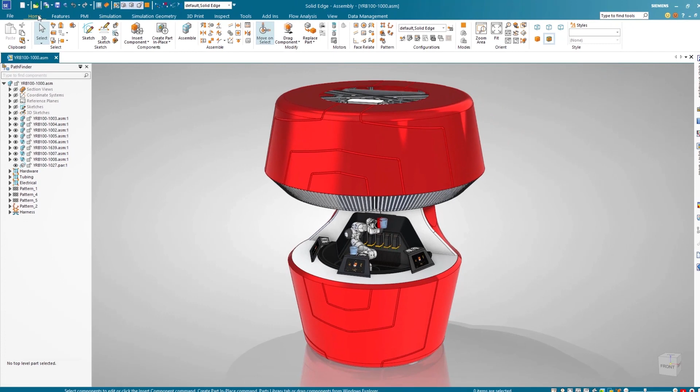Introducing a fresh, modern user interface which is consistent across all Siemens software products, all commands and environments have been refreshed and now provide an easier-to-use, modern, clean look and feel, but still at the core, the Solid Edge you know and love.

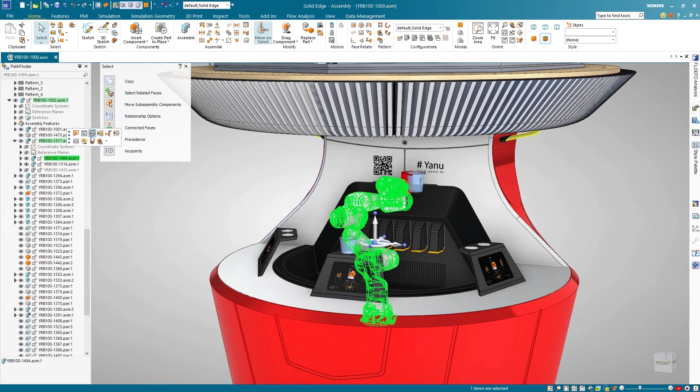The Context toolbar now has expanded capabilities in the part, sheet metal, and assembly environments, providing high-frequency, object-specific commands at the tip of the user's cursor, improving productivity. Focusing on the robot arm, we'll complete the new design of a glass holder.

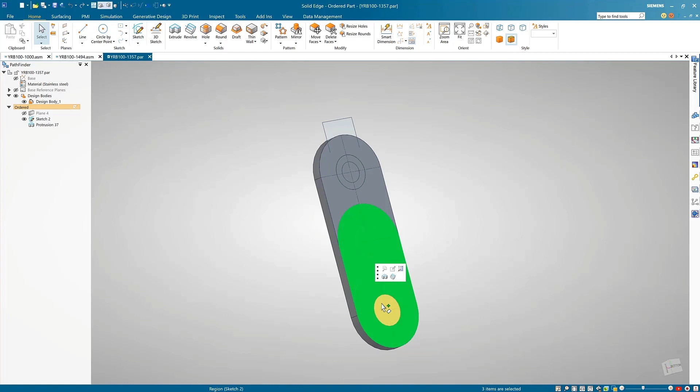The material addition and removal workflows have now been combined into one single command. Also new is the introduction of the automatic regions in ordered sketches. This speeds the process of sketching as it eliminates the need to trim sketch elements and project face edges.

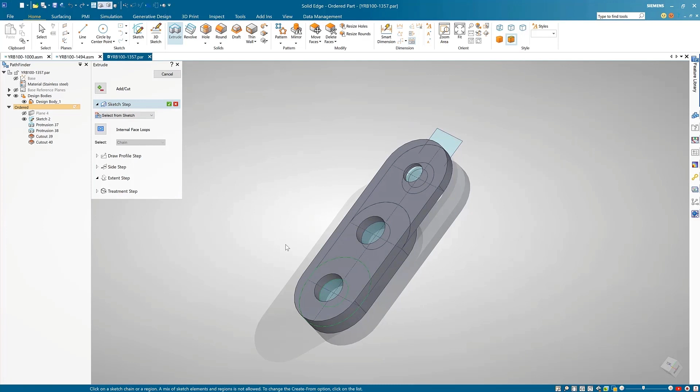Closed areas are simply found automatically, as can be seen here, as we add and remove material with a single extrude command. Also notice the Context toolbar delivering all commands at your fingertips. Changing an extruded feature to a cut couldn't be any simpler. Just edit the feature and change the options. When adding features, the spacebar can also be used as a quick toggle to switch between add and remove.

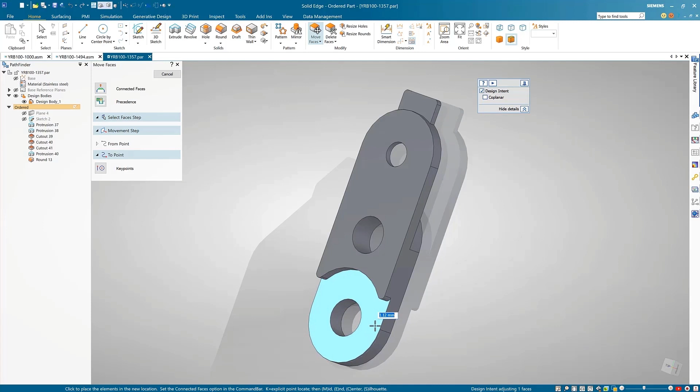Solid Edge speeds up the process of direct editing in an ordered model by introducing synchronous capabilities in the move, rotate, and offset face commands. Here, the steering wheel is used to easily define the move and rotate directions, and design intent rules can be used to control the movement of the other faces in the model. We can see this as we adjust these two cylindrical faces and toggle the concentric option off and on.

One final alteration on this part is to add an angle to the side face by using the rotate command. The enhanced workflow makes this a breeze. Since this is an ordered model, the move and rotate features are captured in the Pathfinder and can easily be edited later.

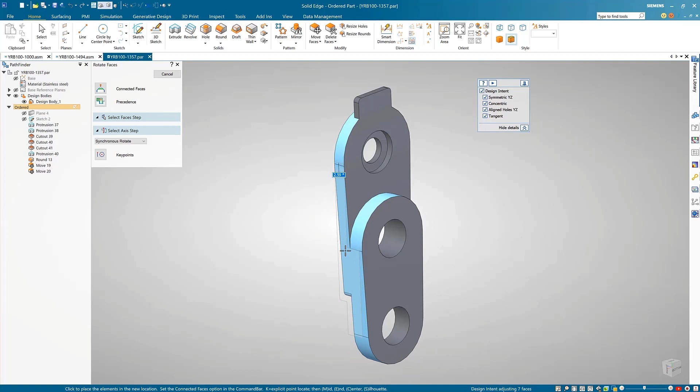The hole feature capabilities have also been extended and now have support for standard fit class tolerances for hole, countersink, counterbore type holes. These conform to ANSI, ISO, and DIN standards.

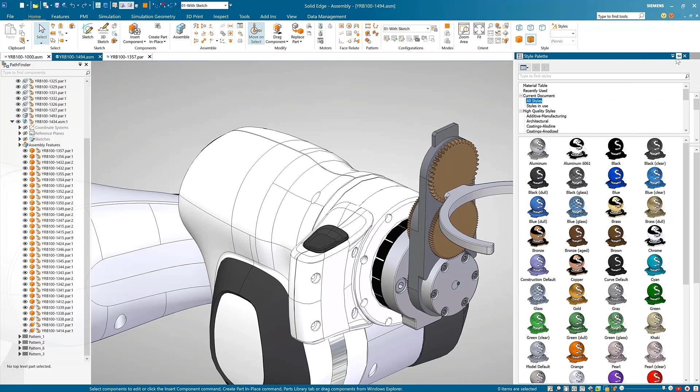Support for unit tolerance has also been added, as well as a new library of high-quality face styles which consist of many common categories containing thousands of different styles, ranging from additive manufacturing, coatings, fabrics, plastics, metals, and many more. They can simply be dragged and dropped onto the desired parts to easily add realism to any design.

There have also been improvements to assembly features with the addition of new commands such as subtract, slot, union, and swept cutout. In this case, we'll add a swept cut to document a routed path through two wooden plinths at the top of the design. The workflow is the same as in the part environment, but with the additional step of choosing the parts to cut.

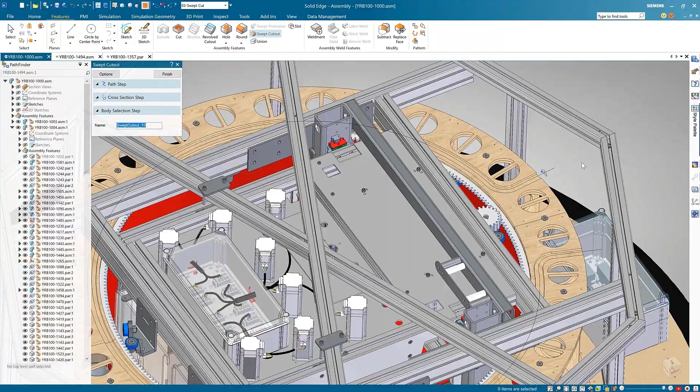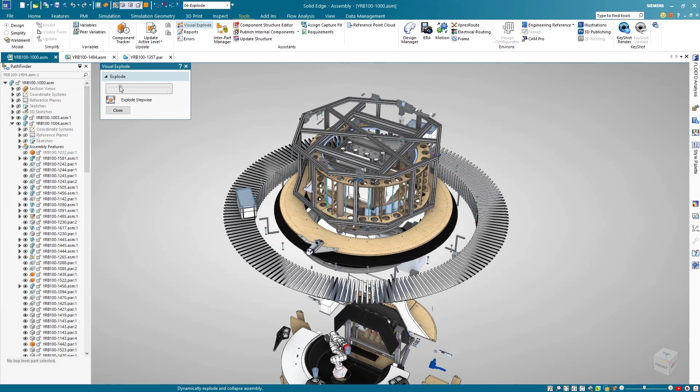Finally, there are new workflows to easily explore and visualize the internal components of any design with a new Visual Explode command. Simply drag the slider bar to dynamically explode the parts on screen, then drag it back to collapse the parts back into place. There is also a stepwise option which intelligently explodes the subassemblies in sequence and provides additional ways to visualize the design.

Solid Edge continues at the forefront of 3D CAD and remains ahead of the curve thanks to increased core CAD performance, new and improved workflows promoting productivity gains, and the continuous implementation of user-requested features and functions.

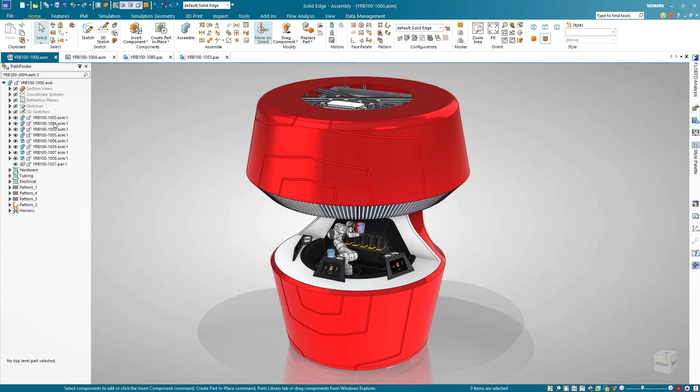Solid Edge provides new advanced PMI and model-based definition capabilities, allowing users to detail 3D models faster and easier than ever before, and to seamlessly share 3D model intelligence for downstream manufacturing processes and to other relevant stakeholders.

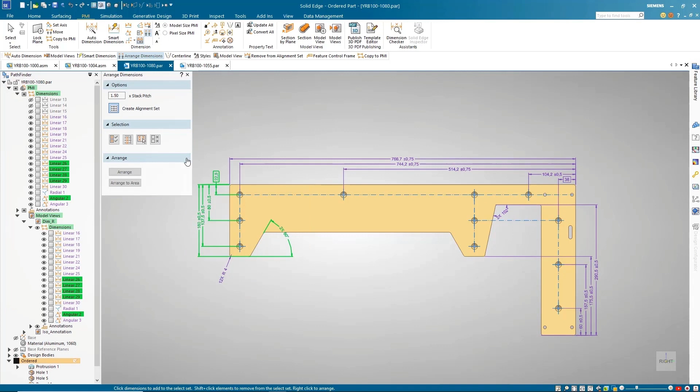New with Solid Edge Advanced PMI is the ability to automatically arrange dimensions on a 3D model with a couple of clicks. Simply select the needed dimensions and arrange them stacked or chained. If dimensions need to be arranged with respect to a smaller area of a model, there is an Arrange to Area option which makes this task easy too.

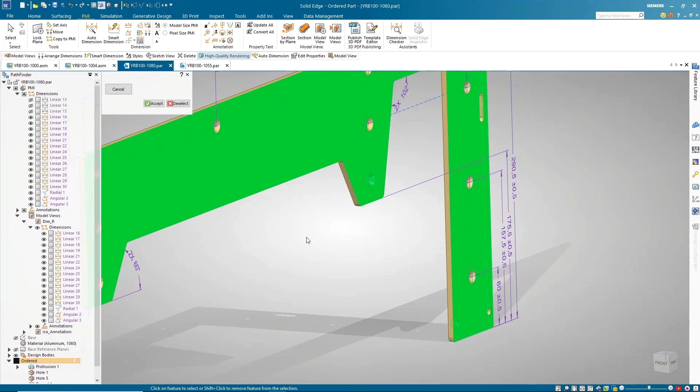This part lacks the necessary dimensions for the size and location of some of the holes. The new Auto Dimension capability takes care of this with ease. All we need to do is select the primary, secondary, and tertiary planes and select the features to be auto-dimensioned or even just auto-dimension the whole model. With support for planar faces, cylinders, and holes, it's never been easier to save time in dimensioning your model. We can even define tolerances to be automatically added to each dimension.

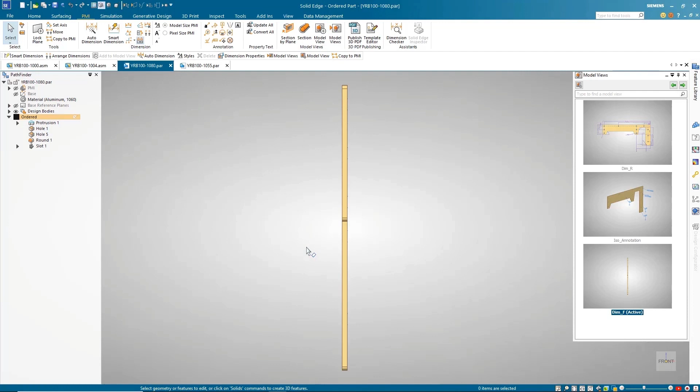The new Model View palette allows for fast interaction with model views and displays easy-to-understand thumbnail images which are directly derived from the model views themselves. Model views can be navigated by clicking on the images or using the arrow keys. It's also easy to create new views directly from the palette.

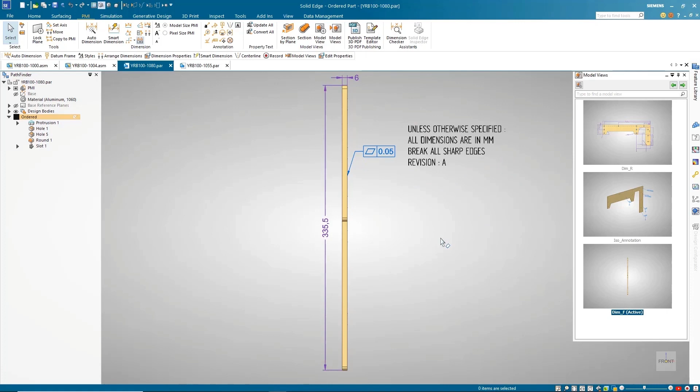Here we'll create a front view for our part to add some of the necessary dimensions to detail the overall height and thickness of the part, and also add a geometric tolerance for flatness. With new text box and notes library features, we can more easily add notes to the model views. These notes can include model properties, like the latest revision of the part in this example. There is also an option to keep the text parallel to the screen.

The creation of drawings is a breeze through the new Model View palette. A right mouse click and selecting a template is all it takes to create a drawing. The same Model View palette can also be used in the draft environment. We will use it to bring in the front view and use the alignment function to ensure it's in the right place. The fit class and tolerance of holes can now be easily retrieved in callouts.

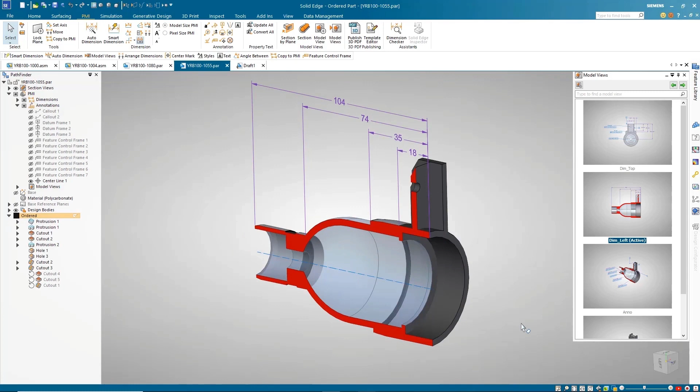Also, the ability to modify the color of cut faces on section views means it's even easier to differentiate internal details of a model and communicate necessary product manufacturing information. 3D Center Axis annotation is now supported for appropriate geometry types, giving users a quicker way to add the desired product manufacturing information to their models.

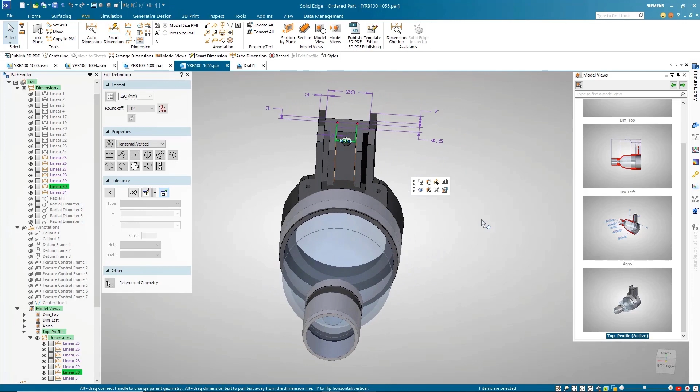Section view dimensions in sketches are now associated to the design body, making it easier to use them in downstream processes. The copy to PMI workflow has also been improved. Now when copying selected 2D annotations and dimensions from a profile-based feature or sketch, once they become 3D dimensions, they are now automatically connected to the corresponding model faces. Selecting the PMI will highlight the associated faces.

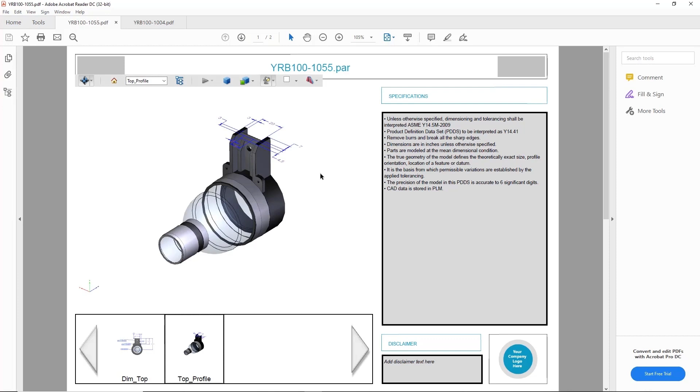Solid Edge model-based definition allows designers to publish all this product information for use in downstream processes. This process is simple and easy, and the publish process creates a high-quality 3D PDF which contains all chosen model views and supports full view manipulation. Assembly documents can also contain a fully interactive bill of materials and much more.

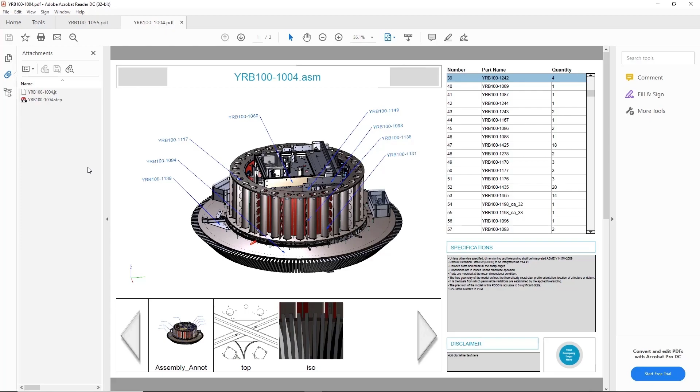Solid Edge Advanced PMI and model-based definition capabilities provide new streamlined tools to detail 3D models faster and easier than ever before, and to seamlessly share 3D model intelligence for downstream manufacturing processes and to other relevant stakeholders.

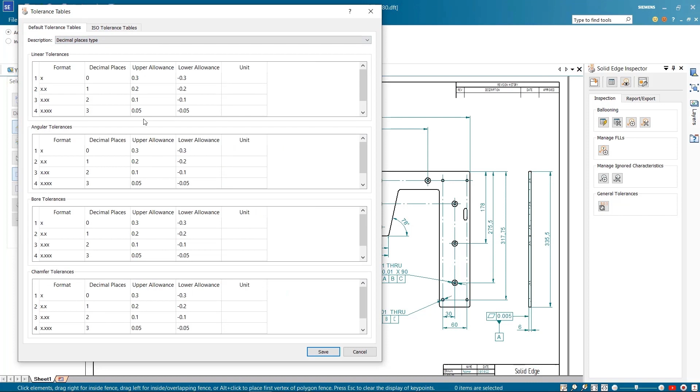Quality inspection is an important competitive factor. Using Solid Edge Inspector makes inspection planning a quick and easy process. Taking a look at the side plate in the Yanu AI robotic bartender will open the drawing that already has all the relevant manufacturing information defined. Launching Solid Edge Inspector, we can set the tolerance standards required. If needed, multiple tolerance tables can be configured, which can later be applied based on part type.

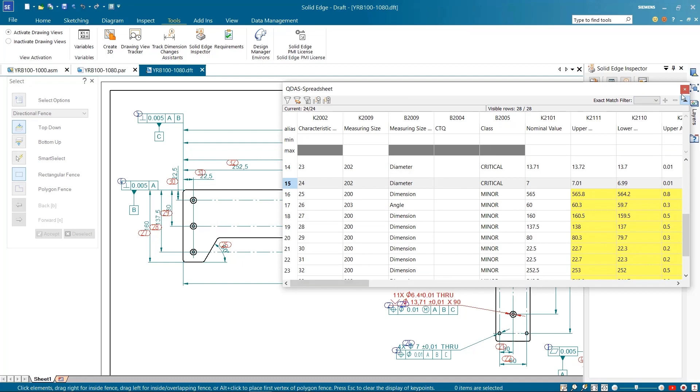Creating characteristic numbers with balloons is a quick and easy process. There is also the flexibility to create balloons manually or ignore some specific dimension types. Based on the standards and configurations which have been set here, the default tolerances get applied for the dimensions which don't have specific tolerances defined. These dimensions are highlighted in yellow in the characteristic table. At any time, the dimension class can be controlled to define how critical they are. The inspection balloons can also be shown or hidden when required.

This inspection information can be exported into multiple file formats, which can later be used in downstream applications. It's also possible to export this information as a separate project file, which can later be re-imported into the drawing. This is very useful in situations where the quality team doesn't have write access to the CAD files. Inspection reports can be generated by choosing a template that can be easily configured for any industry standard.

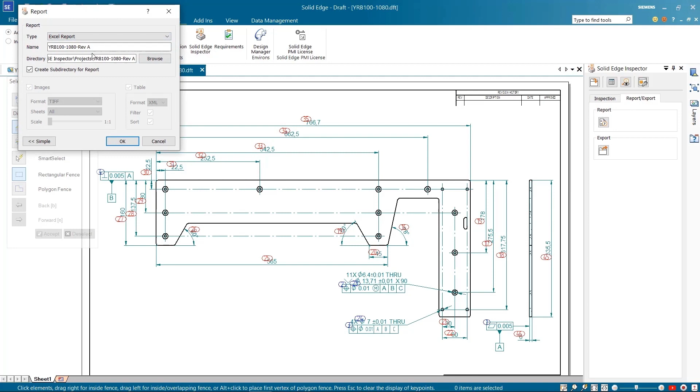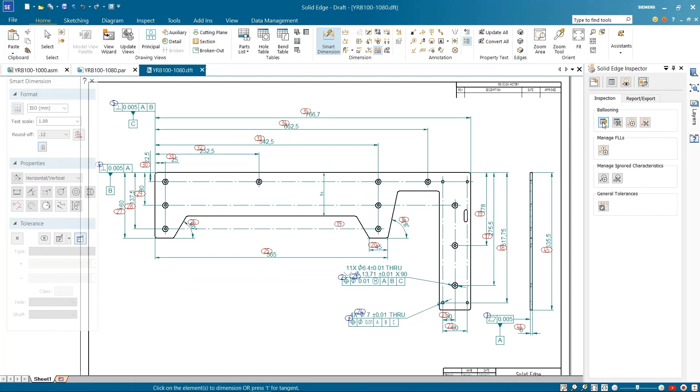The inspection data can also be easily updated to accommodate any design changes. Here, a change is made to the model in the drawing, then subsequently updated. At this time, we'll also delete a dimension and add a new dimension. Then a click of a button updates the inspection data. This will add a balloon to the new dimension and update the CN list with this and all the other changes that were made. The changes like modified, new, and deleted dimensions are captured as part of the CN list.

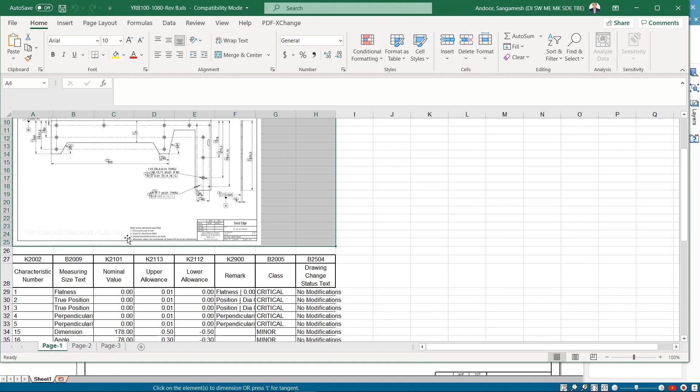Filters can be applied to these columns similar to Excel. As the design has been modified and the drawing updated, we'll generate the inspection report and see the updates. The list shows new, modified, and deleted dimensions. Filters can also be applied to the CN list to generate a compare report.

This shows only the changes that were made when compared to the previous revision.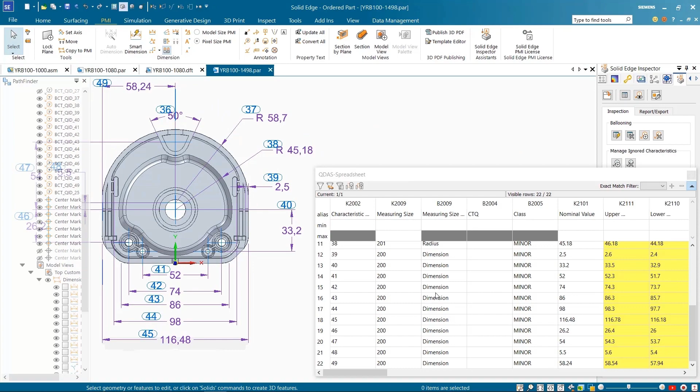Solid Edge Inspector also fully supports a model-based inspection process. This means it works seamlessly on the 3D model in an MBD workflow. Just like we saw for the 2D drawing, it's possible to create and edit balloons and generate a report on a 3D model using the PMI dimensions and annotation. Solid Edge Inspector, providing a competitive edge by streamlining the quality and inspection planning process.

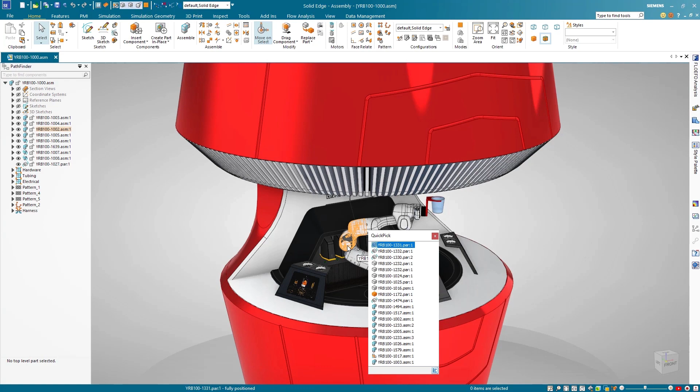Solid Edge is even more tightly integrated with other downstream processes and now has the ability to transfer assembly kinematic information to applications such as NX or Process Simulate in order to perform further dynamic studies or operations. In this example, we save time and minimize errors by transferring the motion kinematics of this robot arm from Solid Edge to Process Simulate.

Starting in the Solid Edge motion environment, we'll make sure the kinematics are properly defined by selecting the parts, then choosing which ones are moving or fixed. This creates the 7 needed joints to replicate the 7-axis Panda robot. Once this is done, the motion of the robot can be verified by running the basic simulation.

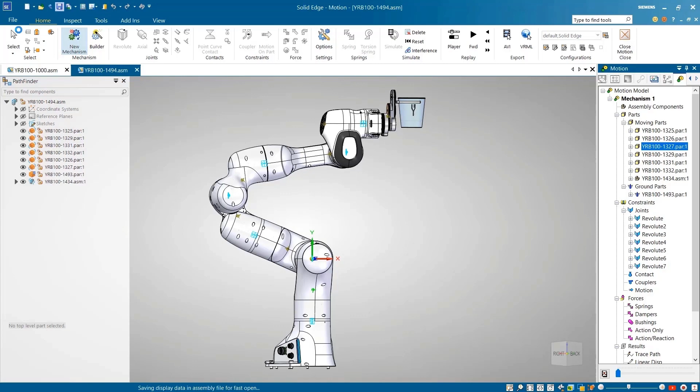Now, the Solid Edge model can be exported complete with all the appropriate kinematic information and subsequently opened in Process Simulate. Once in Process Simulate, we can see that by using the Joint Jog option, all the relevant kinematics are present without having to do any additional manual setup work. The kinematic information of all the joints can be viewed by setting the modeling scope and using the kinematic editor.

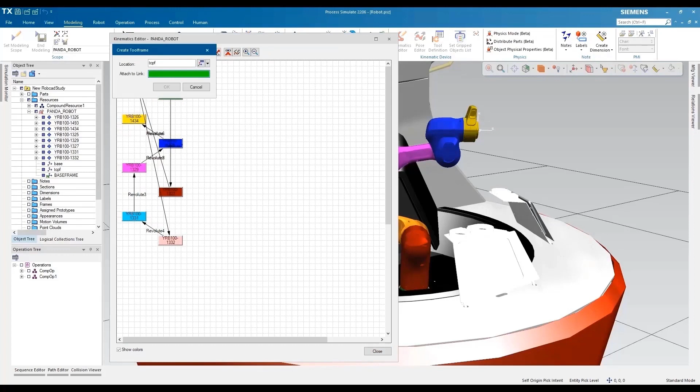Here, kinematic relations are used to define the robot and simulate the reach movement. We can see that all the joints are correctly connected with each other in the sequence that was defined in Solid Edge. The movement can then be defined from the tool center point frame using inverse kinematic movements that are calculated automatically. Finally, we can simulate the action of the robot and see the exact movement needed to mix our drink of choice.

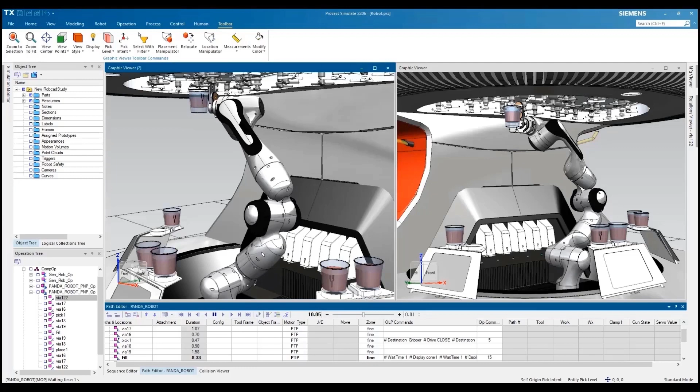Solid Edge increases productivity by providing even closer interoperability and integration with other solutions in the Xcelerator portfolio from Siemens, such as Process Simulate and NX Mechatronics Concept Designer.

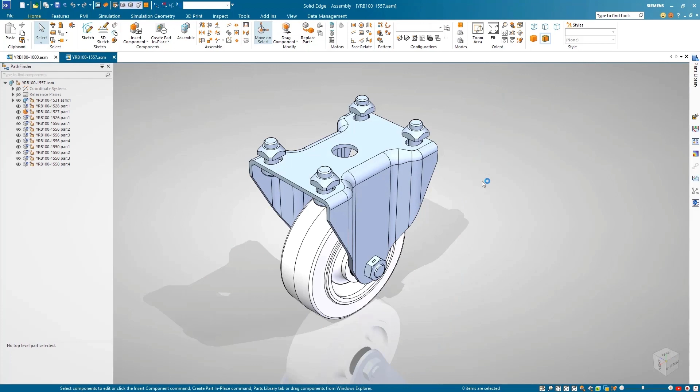Solid Edge continues to accelerate the design process by providing powerful tools to help digitally validate designs and build better products in less time by front-loading the simulation process. Starting with the generative design study, which will help optimize the weight and material usage for this caster wheel component. After creating a new study and defining the loads and constraints, we have the new ability to define the maximum displacement for a point on a given face. This helps guarantee the model has the appropriate amount of stiffness in a given direction.

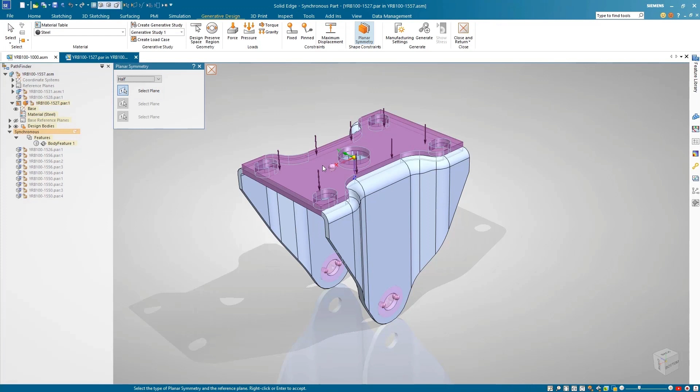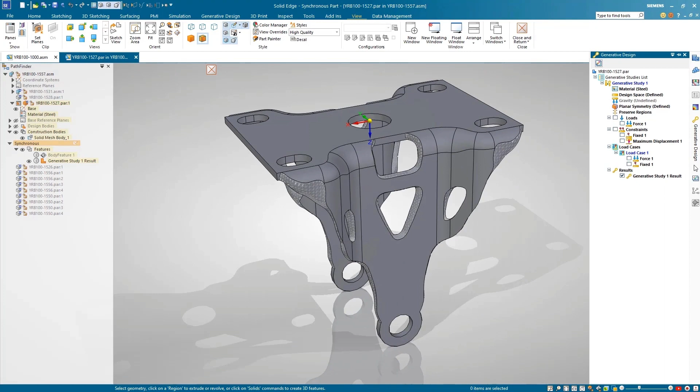Also, planar symmetry is a new shape constraint that optimizes the model across 1, 2, or 3 orthogonal planes. This ensures the optimized model will result in the best possible symmetric design. Viewing the results, we can see that both sides of the model are identical to the planar symmetry constraint. Selecting the Show Stress option gives immediate feedback on the areas of high stress concentrations so that we can adjust our model if necessary. The optimized generative design is a unique hybrid model that combines BREP and mesh geometries, which can be sent directly for additive manufacturing.

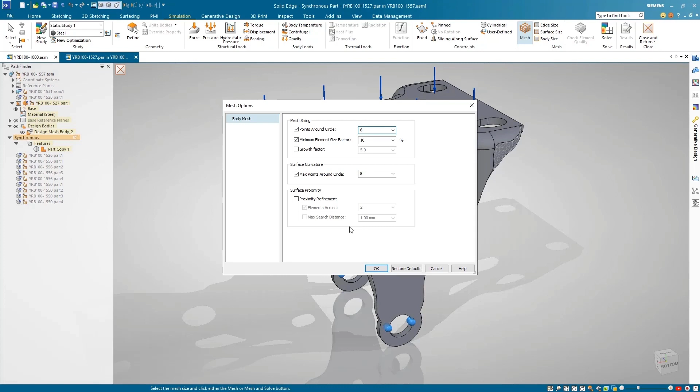Moving to structural simulation, Solid Edge now supports the ability to analyze these hybrid mesh and BREP models. This allows us to easily validate the results of the generative study by applying the same loads and constraints to a new study. The body mesh option, which is now available in the part, assembly and sheet metal environments, has some new options which allow the resulting mesh to be simplified and improved by defining parameters such as the number of points around a circle. In addition to producing a good quality mesh, it provides automatic geometry cleanup of small faces and edges.

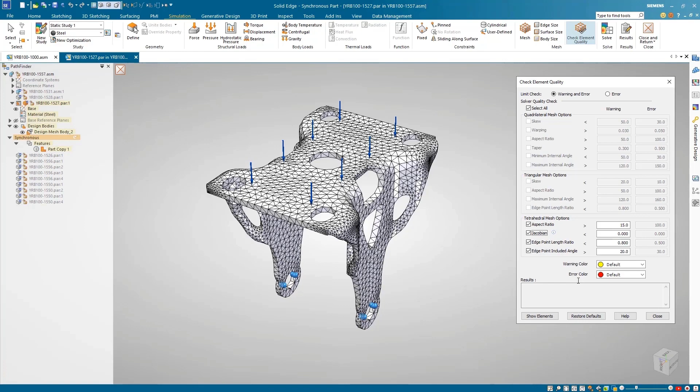After solving, we can analyze the model and see that areas of high stress match the results we saw during the generative design study. A new Check Element Quality command has been added, enabling us to view and report any poor quality elements created when meshing. There are 14 Nastran quality checks available. Here we're checking the tetrahedral aspect ratio, or ratio of longest to shortest element edge.

Selecting Show Elements highlights and displays the warning and error elements in the model, as well as generating a report containing a summary of error elements. There are no errors in our mesh, but a few warning areas could be improved in a future study if needed.

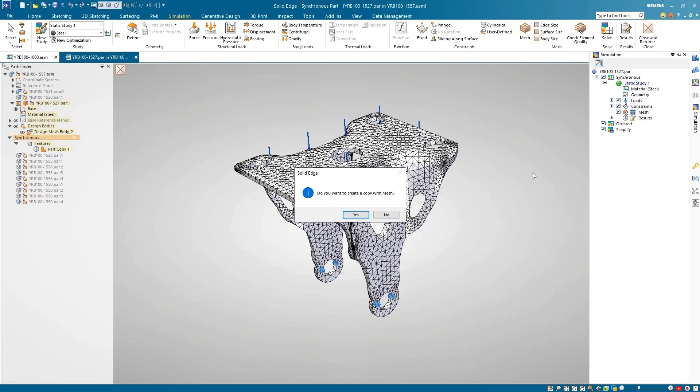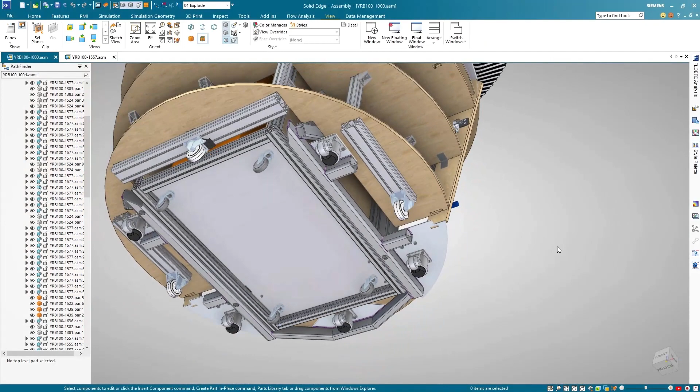A great usability enhancement is the ability to reuse an existing mesh. Here, we'll duplicate our study and bring the mesh with us. We want to test the model again, but with a higher load this time. By reusing the mesh, we are able to save valuable time by not having to remesh the same geometry. This enables us to quickly run multiple iterations of our study, ensuring the design meets all of the necessary requirements. Solid Edge further enhances our robust simulation capabilities, saving valuable design time and reducing material and testing costs.

Transform your manufacturing and maximize your design data with the powerful automated tools of Solid Edge's fully integrated CAD/CAM solutions.

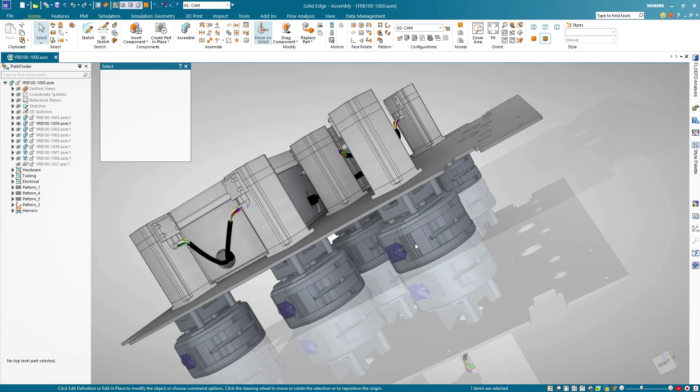Starting with some 5-axis machining, we'll focus on this part. Since it has features on all sides, a 5-axis approach will allow it to be machined in a single setup. The fixture has also been designed completely in Solid Edge. This is using a window frame technique where the stock body also serves as the holding device. A single button click sends the whole fixture and part to Solid Edge CAM Pro.

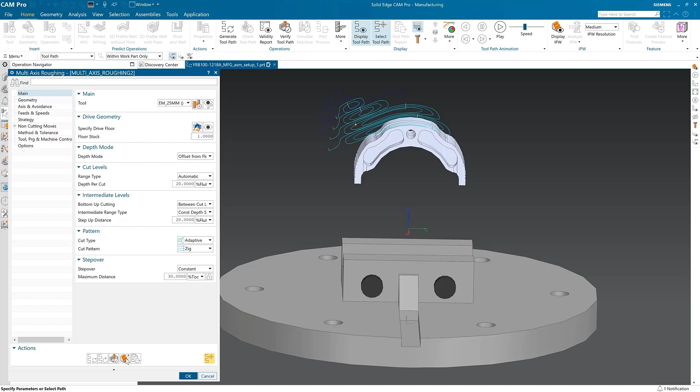Opening an existing setup reveals some CNC programming work that has already been done. Solid Edge CAM Pro now supports the adaptive roughing cut pattern for 5-axis roughing. This means very efficient machining and expert control on the stress of the cutting tool, which extends tool life as a result. Here, we'll also look at the machining simulation.

This is another great innovation in Solid Edge CAM Pro, the ability to perform G-code-based simulation. Here, the machine motion on the virtual machine is being driven by the actual G-code file. We can visualize all the axes tracking while the G-code file is being run, a true example of leveraging the digital twin.

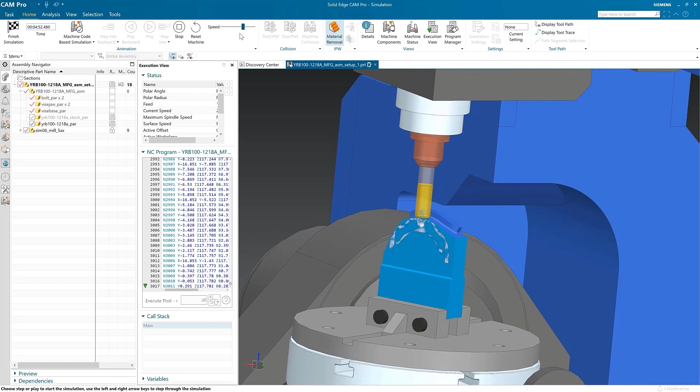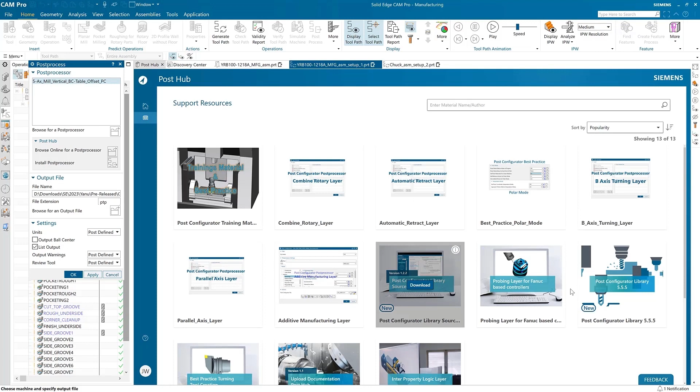Another great enhancement in CAM Pro is the addition of Smart Machining Kit Simulation within the PostHub portal. There are packages covering 3, 4, and 5-axis G-code simulation. Each package provides access to all the machines in that group. Also, PostHub can now be a repository for things other than post-processors. For example, best practice documents, technical libraries, and much more.

Another new capability is the ability to perform rotary roughing on 4-axis machines. Not only is the operation easy to use, but as the machining simulation shows, it does a great job with this spiral groove or any other 4-axis feature. Solid Edge CAM Pro also introduces a brand new wire EDM capability. This makes programming these operations a breeze.

Transform your manufacturing and maximize your design data with the powerful automated tools of Solid Edge's fully integrated CAD/CAM solutions.

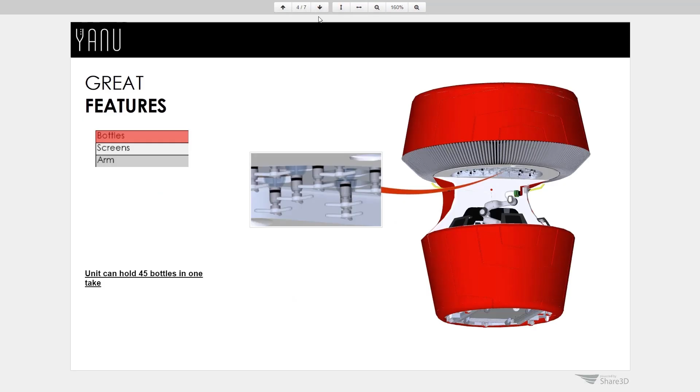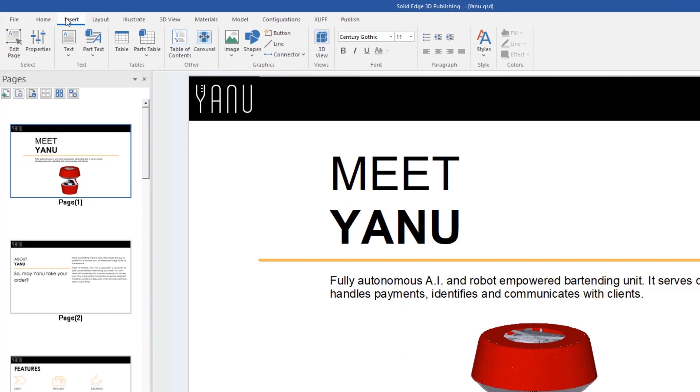Solid Edge 3D Publishing speeds the process of creating compelling and engaging technical documentation, such as installation, maintenance, and instruction manuals, which are essential to business success and product performance. Let's dive into the creation of this document for our Yanu AI bartender. With a fresh, updated user interface, with improved performance and a modernized look and feel, creating documents with Solid Edge 3D Publishing is a breeze.

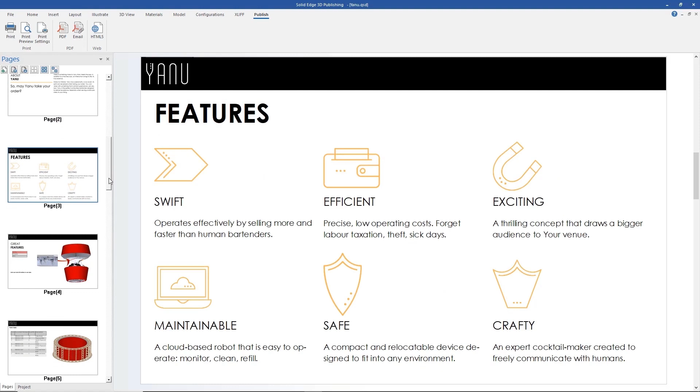A new Pages tab allows for easier navigation of documents. With a thumbnail image available for each page, users can now navigate their document by clicking the thumbnail to go directly to that page. Also new is the ability to assign rich text to metadata and illustrations. Here, text can be fully customized to fit your needs.

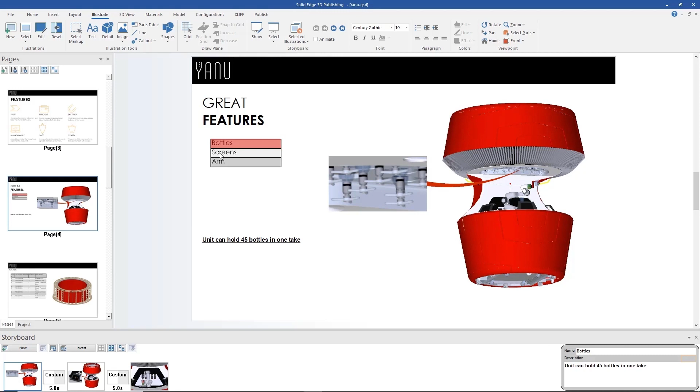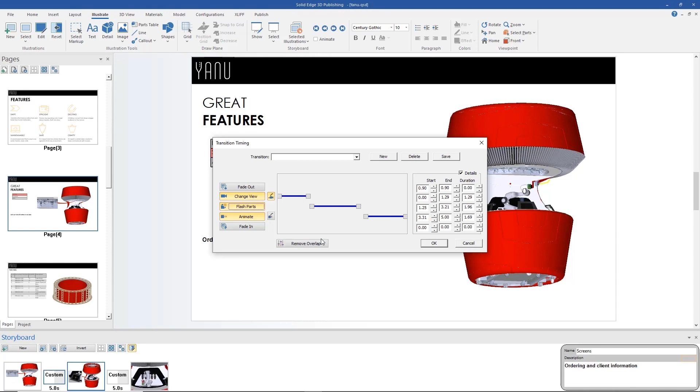Animations play an important part in conveying different messages and features in documents, whether marketing or instructional. Here, a new transition editor makes it easier to create custom transitions with user-defined timing for camera movement, part reveal, and other animation features. There are also 2 new animation types, flash and fade. Here, a flash animation is being used to highlight the LCD screen, and then a fade animation slowly hides the screen in order to focus on the robot arm in its animation.

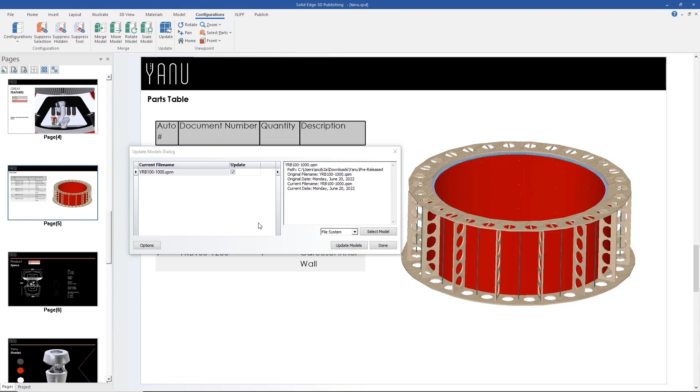Also new is the ability to use simplified parts and assemblies, family of parts, and family of assemblies. For the Yanu instruction manual, we'd like to hide some key details on some of the parts in order to protect our intellectual property. To do this, we can easily replace the detailed parts with their simplified representations. This is achieved with the update command. Solid Edge 3D Publishing then takes care of replacing them in our model, all achieved quickly and easily without having to recreate the document from scratch.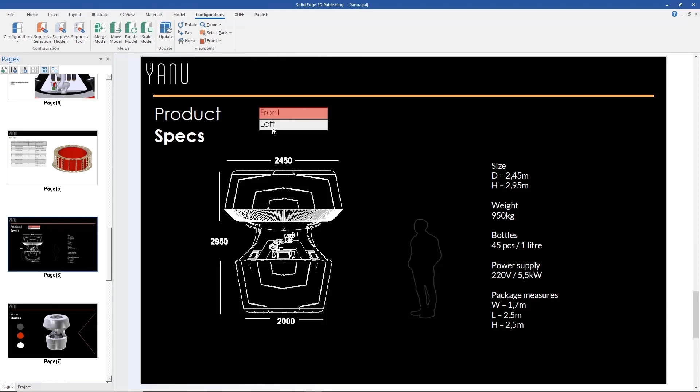Users can now define multiple master pages to help with document creation. This provides more versatility in larger documents. Shapes can act as fully actionable items in Solid Edge 3D Publishing. Users can customize them for various purposes such as switching illustrations, customizing views, or even directing to web pages. In this page, we can use the buttons to switch between different colors of the Yanu AI bartender.

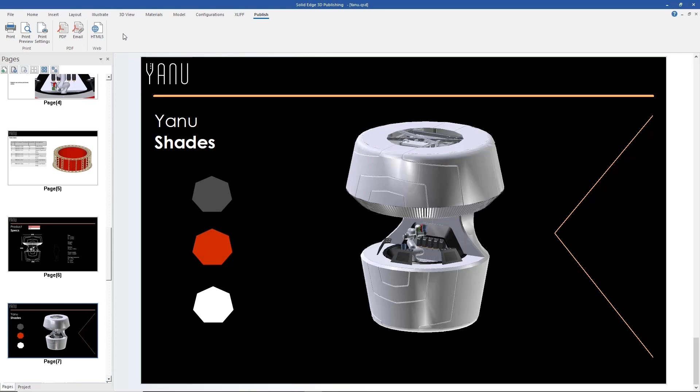Documentation can be published to all the latest industry standard file types, including 3D PDF, HTML5, raster, and vector images. Here's the completed instruction manual in HTML format. End users can access this information without any additional software, as it will open in any web browser. With Solid Edge 3D Publishing, creating technical documents and interactive manuals has never been easier.